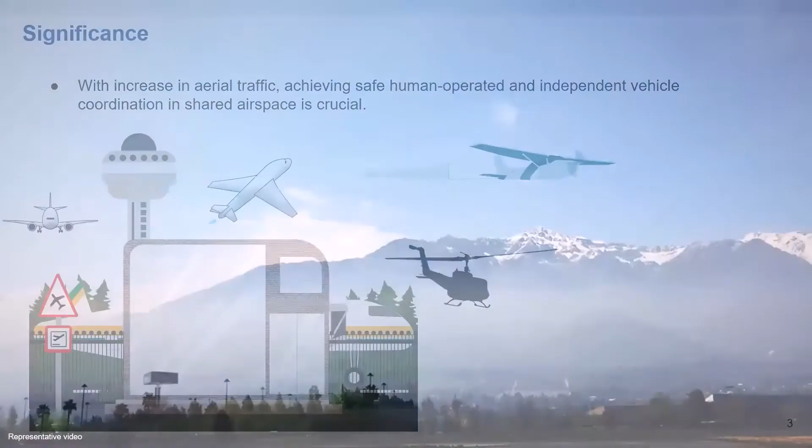The future of aviation will see a massive increase in low-altitude aircraft operations that fall under general aviation. An increase in the number of flight hours results in increased conflict and conflict resolutions. In the absence of a centralized traffic control tower in the vicinity of airports, pilots are expected to follow the FAA guidelines, be socially compliant, and maintain separation by taking flexible actions.

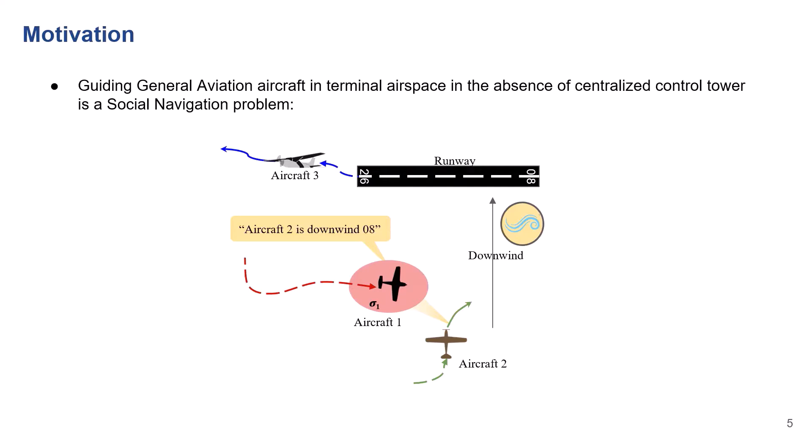With each aircraft having a specific goal and requiring to maintain safety, guiding general aviation aircraft is a social navigation problem. Two main directions have emerged in recent research. Reinforcement learning methods have a shortcoming when the reward function structure is not well defined. Training in the real world is difficult and expensive, and using a multi-agent simulator presents the issue of accurately modeling human-like piloting behavior, which leads us to the initial problem.

On the other hand, learning from expert human demonstrations using inverse reinforcement learning or imitation learning can attempt to provide a more natural, human-like motion, and it's a popular research direction. This work uses the recently released TrajAir Dataset, which is collected at the Pittsburgh Butler Regional Airport. Here, we observe the airport traffic pattern, a rectangular shaped pattern, ensuring air traffic is flown into and out of an airport safely and in an orderly manner.

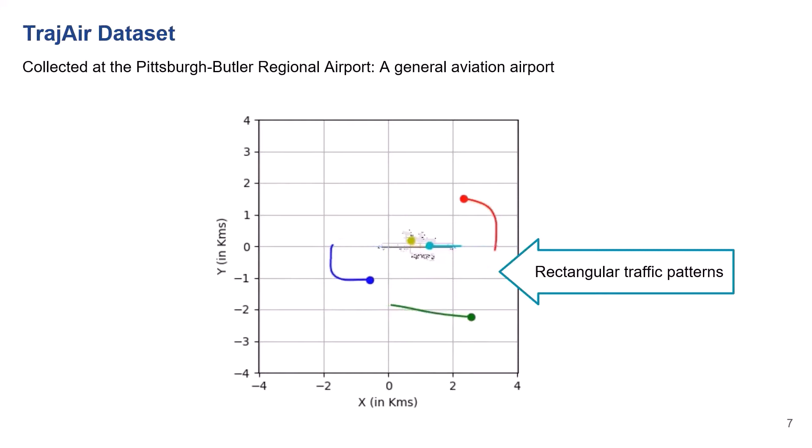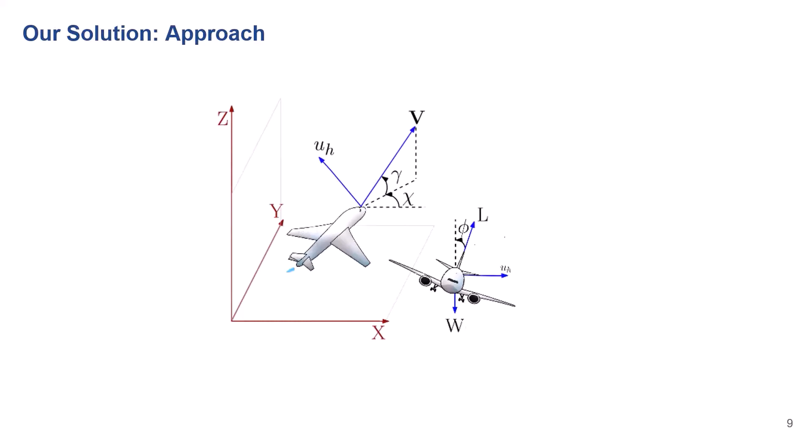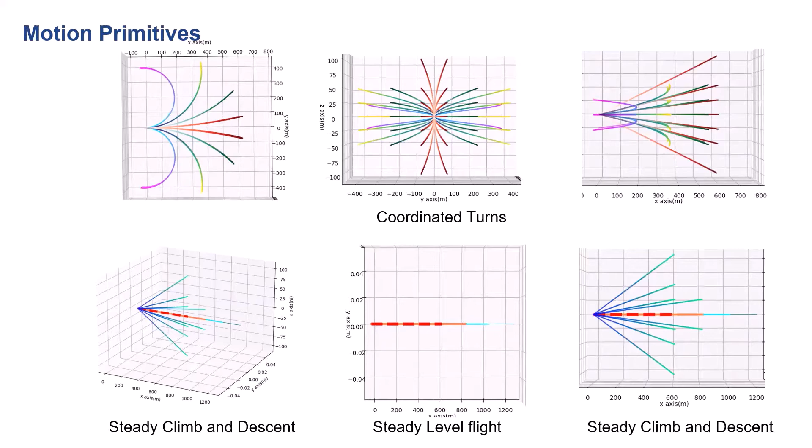The dataset trajectories are smoothed using B-spline approximate representation of degree 2. We consider a fixed-wing aircraft flying in three-dimensional Euclidean space to calculate a set of trajectories in the inertial frame. We choose three broad categories of motion: steady level flight, steady climb and descent, and coordinated turns. We vary the velocity, rates of climb, and bank angles over the chosen time horizon.

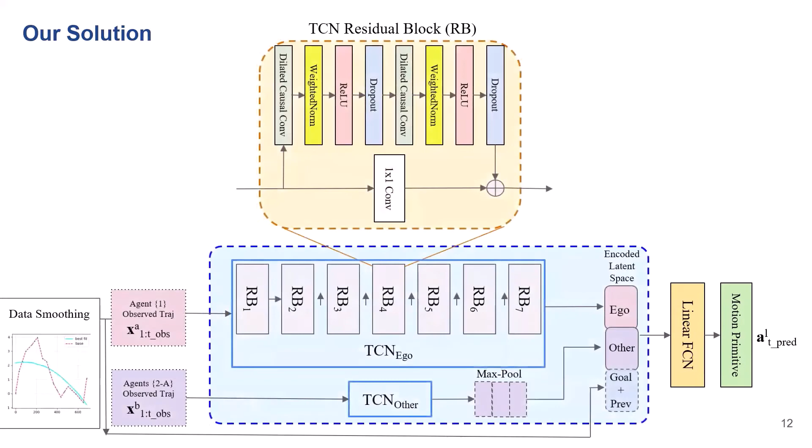In this work, we use a form of imitation learning known as behavior cloning that learns a policy from expert demonstration, taking as input the past trajectories of all agents along with the weather context to predict the next action. The model uses a temporal convolutional network to process the sequential trajectory data. We break the trajectories in a scene into sequences of fixed length. We encode the trajectories and concatenate them to output a single motion primitive at each iteration.

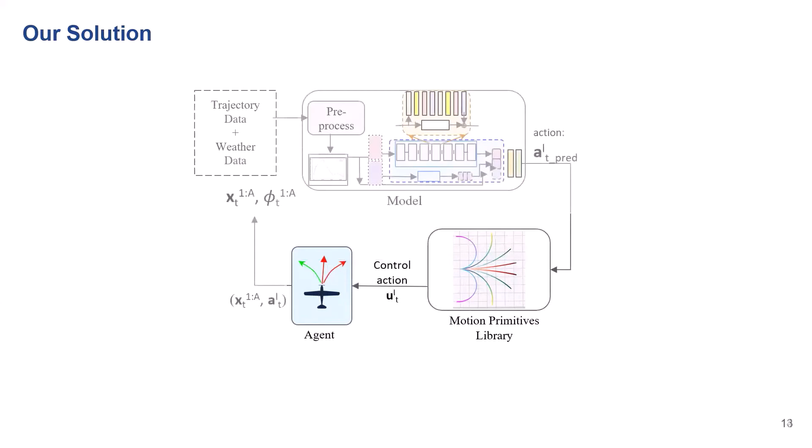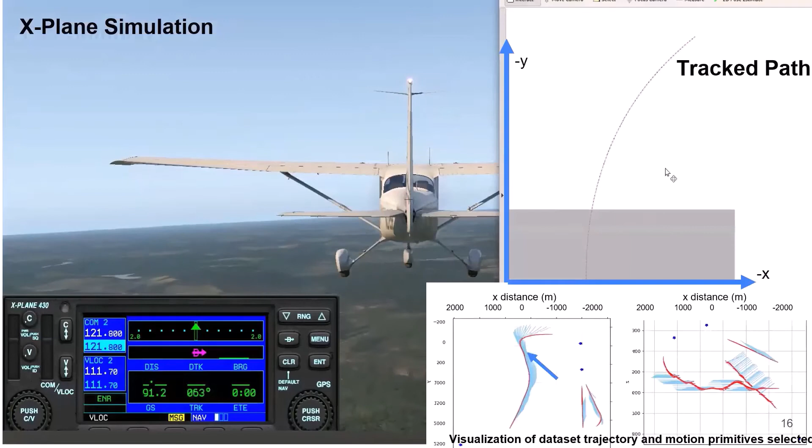The selected action from the motion primitive library is sent to the agent. The trajectory data and the environmental context vector for each agent is collected to close the loop. Here we show simulation results of an action predicted. Actions are input to the X-plane visualizer. On the top right, we see the track trajectory. On the bottom, we see the dataset trajectory and the predicted actions. Here the aircraft is commanded to take a right turn.

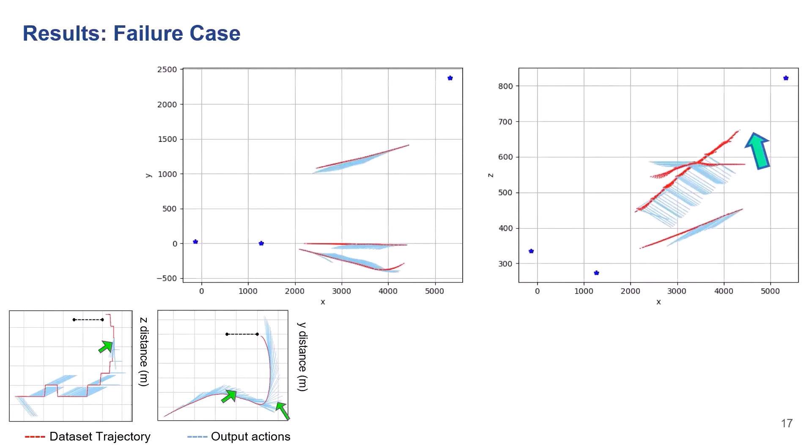We also show a failure case. The green arrow shows the locations where the actions were wrongly predicted opposite to the direction of motion of the agent. We thus see behavior cloning requiring a large number of demonstrations, and it deviates when encountered with out-of-distribution states. We use three evaluation metrics: average displacement error and final displacement error for the trajectories, and cross-entropy loss for the selection of motion primitives.

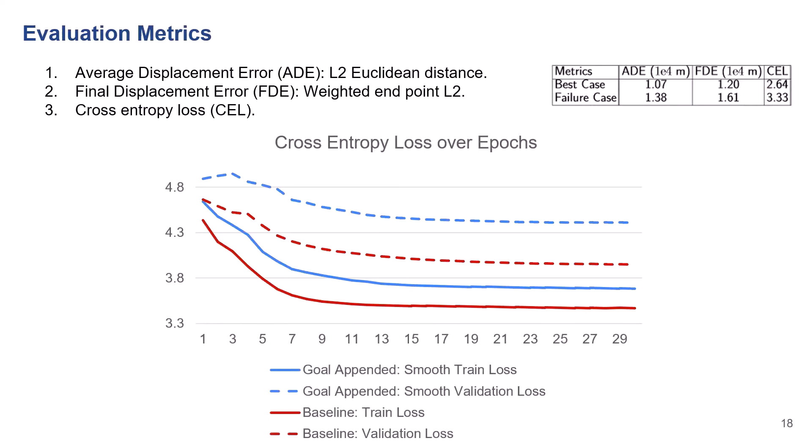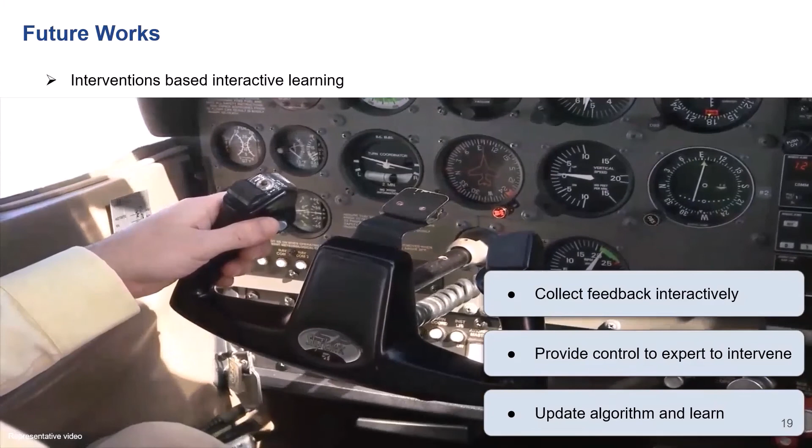Our next step is to collect feedback interactively and provide the expert full control to intervene. As the expert actions are aggregated, we expect the algorithm trains a new policy with significant improvement. We would use the interventions from the supervisor to bring back to safety, update the algorithm, and learn.